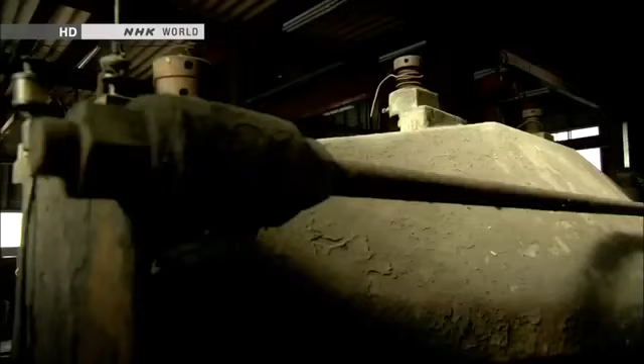The future is just around the corner. In a workshop near Mount Fuji, a curious being has appeared. It's 3.8 meters tall and weighs 4 tons. It is a giant humanoid robot named Kuratas.

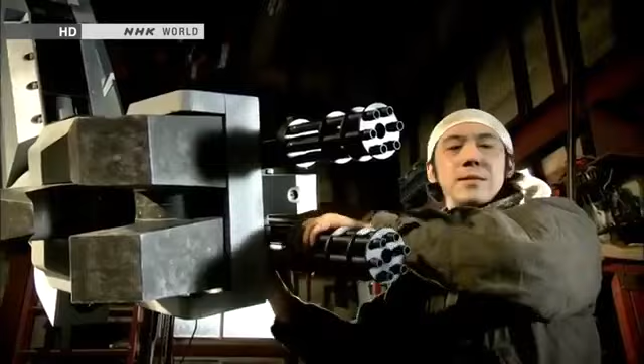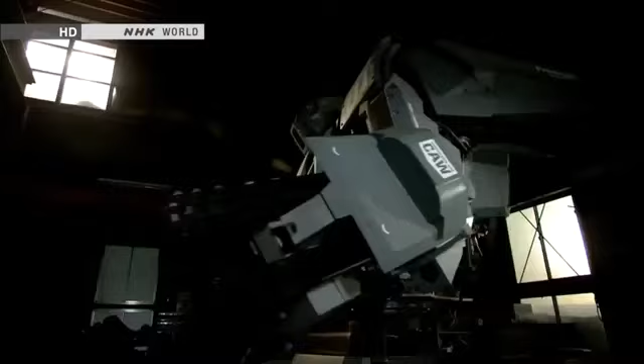Kuratas is a contemporary artist's creation. He holed up here for 2 years, building the robot with input from an expert. He calls Kuratas a work of art, but it's a sophisticated piece of machinery. A person seated inside can control the robot, move its limbs, and grab things. The artist says he was inspired by robots in science fiction tales and animation. That vision sustained him as he worked in solitude.

Things that were once unthinkable are becoming real. How will robots evolve? Well, military applications could be one option. They'll probably become more and more like humans. They could surpass us in strength and ability.

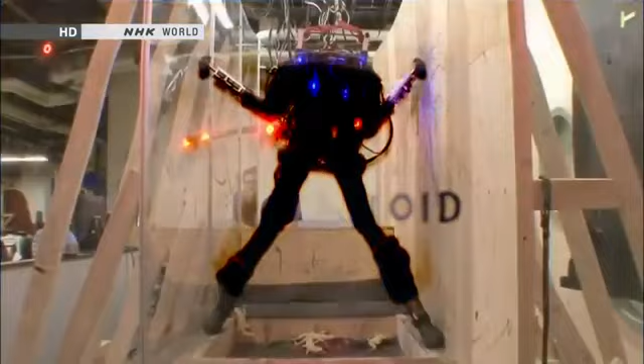People long dreamed of creating these extreme machines. Now, humanoid robots are here. They think like we do, move like we do, and even sacrifice themselves for us.

We want our robot to change society, because robots must be useful. Electronics and computing, progress in vision systems, there are many pieces of it. We will see much more capability continue to grow.

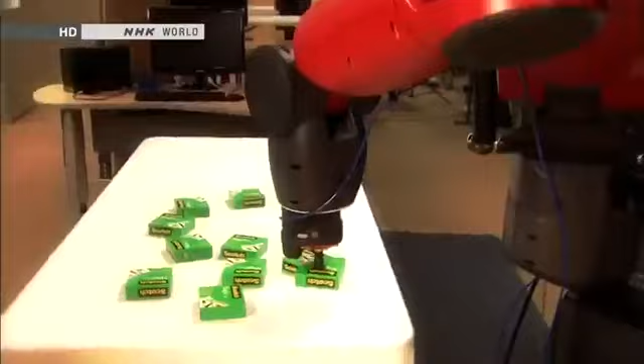Since the Industrial Revolution, people have entrusted some jobs to machines. But there may come a day when humanoid robots do much more complex jobs. Then, what will people do? You'll see more and more robots doing things in society, whether it's manufacturing or service applications or home healthcare applications. The key will be to skillfully divide labor between humans and humanoid robots.

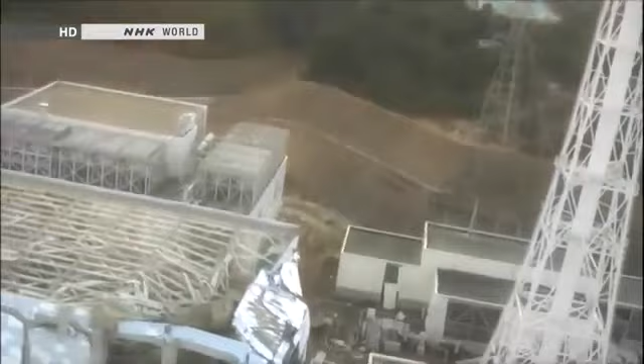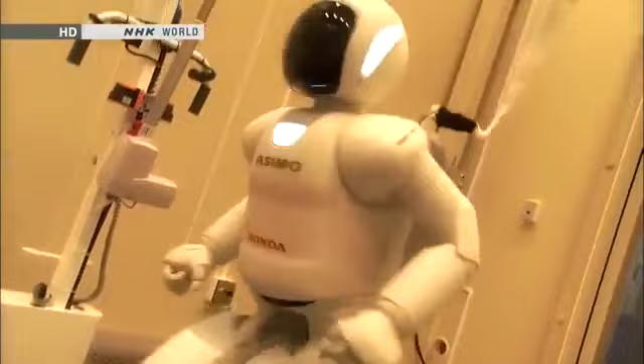We're eager to launch it soon to end the crisis. By joining forces, we can make a truly useful contribution. Only a humanoid could do it. Or the day will come when robots will really assist mankind.

The nuclear disaster in Japan sparked explosive advances in humanoids at the front line of robotics development. This program explores the future that's fast approaching.

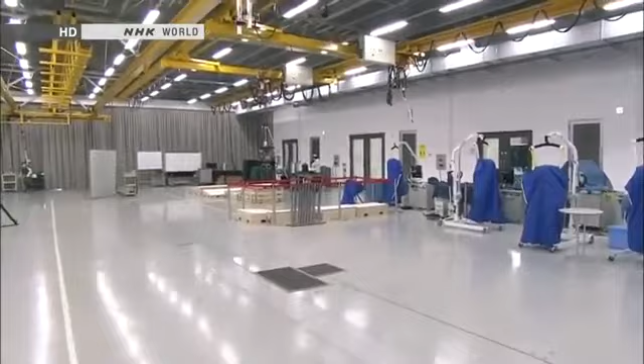Japan is a worldwide leader in the development of humanoid robots. Asimo is the country's crowning achievement. Engineers continue to make improvements.

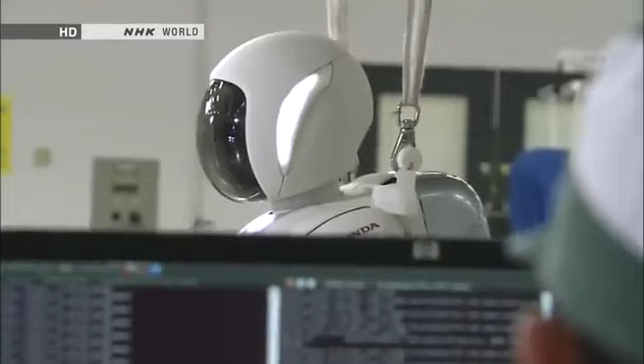Asimo's most innovative feature is its advanced intelligence. The robot can think and act on its own without human intervention. That's made possible by sensors that replicate our 5 senses.

Asimo's head contains 8 microphones. It uses them to listen and engage in conversation.

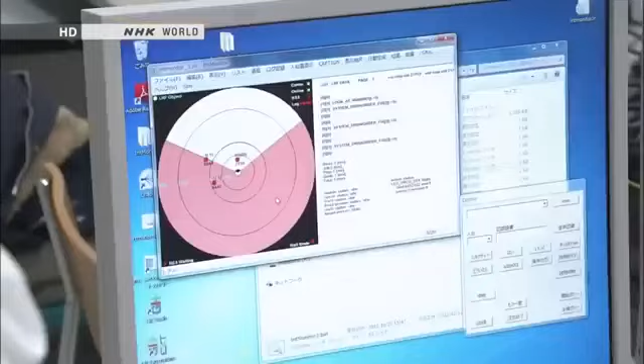Asimo's artificial intelligence analyzes a vast array of information. That's how it understands people's requests and takes appropriate actions.

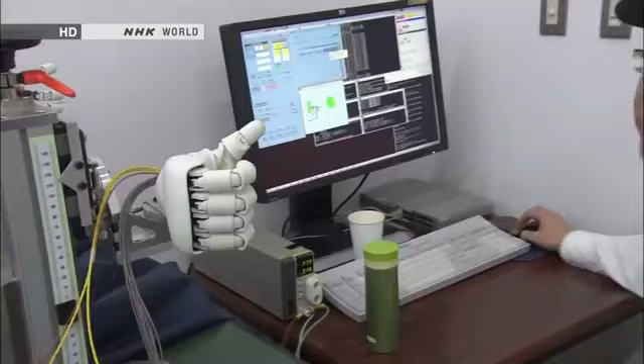Asimo also has a sophisticated sense of touch. Its fingers can make subtle movements, like a person's. Sensors are embedded in the fingertips, too. They can gauge the hardness of an object, like human fingers do.

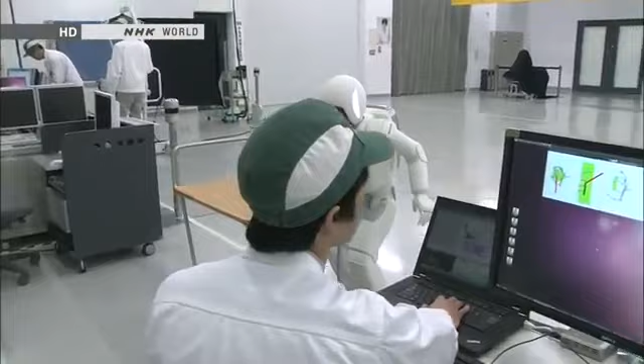Most robots use a fixed amount of strength to grab things. But Asimo exerts more power to open a tightly sealed water bottle and less when holding a paper cup. Its artificial intelligence uses information from the fingertip sensors to adjust the grip.

The developer's ultimate goal is for Asimo to be a valuable partner that coexists with humans. The engineers who created Asimo all grew up watching animated shows about robots, such as Astro Boy, Doraemon, and Gundam. They dreamed of someday making their own.

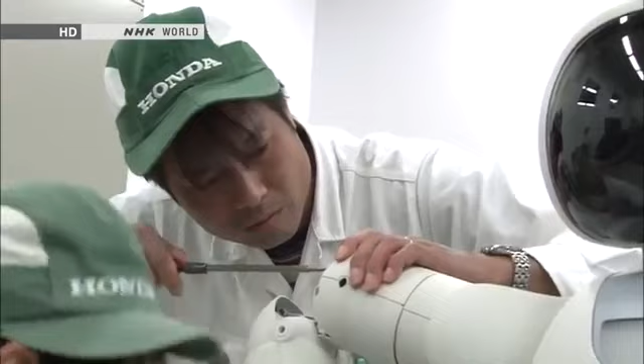Satoshi Shigemi is the development team's leader. He has been designing robots for the past 16 years.

From the beginning, we wanted to design a robot that could help people. To realize that dream, we're constantly asking ourselves, what kind of robot would be able to change society, make people happy, and make life easier for people around the world? Our idea is to create a robot that will change how people live. We're working through the technological issues, one by one, in order to reach that goal.

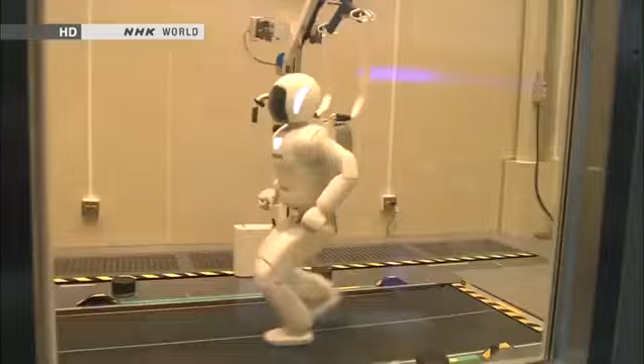Asimo's advanced physical capabilities are revolutionary. The robot can walk and run. It can reach speeds of up to 9 kilometers an hour.

For robots, walking is much easier than running. When running, both feet momentarily leave the ground. Balancing in mid-air is no easy task.

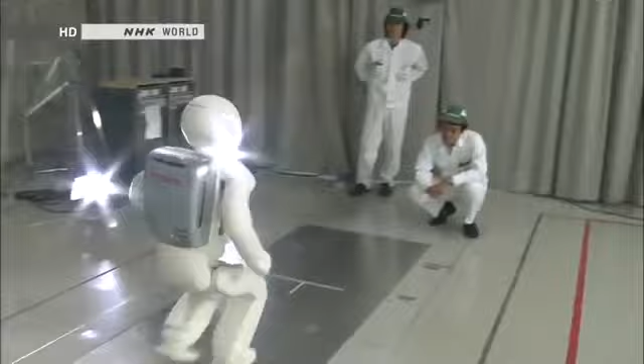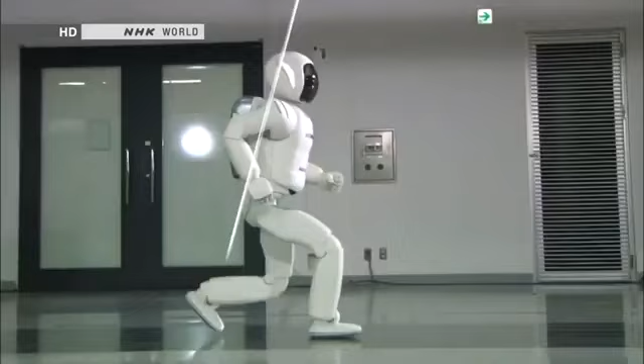Maintaining posture while jumping or floating in the air was a major technological breakthrough. Asimo leans its upper body slightly forward to maintain overall balance. It goes forward straight in the air.

Sensors in Asimo's waist measure the robot's angle. It leans slightly to compensate, forward or back, side to side. That's how it stays perfectly balanced in the air.

Asimo has been evolving ever since development began in 1986, much like a growing child. But something happened that made researchers realize Asimo's real-world limitations.

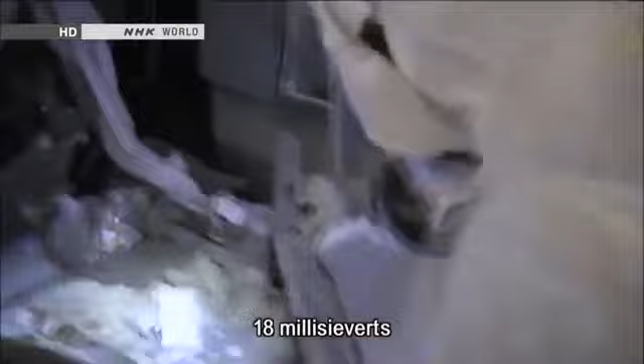It was the accident at Tokyo Electric Power Company's Fukushima Daiichi nuclear plant. The damaged reactors released radioactive substances, making it difficult for humans to deal with the crisis. People needed something that could confront the dangers and bring the plant under control.

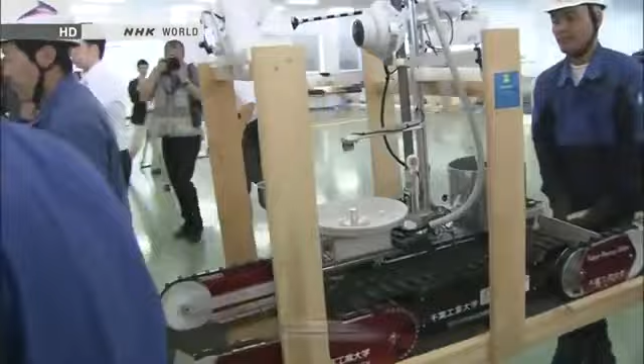Robots. Japanese officials sent a request for robots developed by the US military. Then, a variety of Japanese robots have been enlisted as well.

Robots have proven to be useful, but 2 years after the accident, they're only used for inspections. They're not able to do all the work of humans.

What about Asimo? Right after the disaster, people flooded Honda with phone calls and emails asking the company to send Asimo to the Fukushima plant.

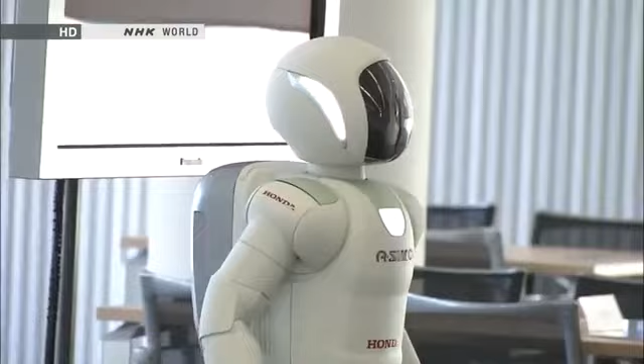But Asimo wasn't up to the task. It could move nimbly over an office floor and other flat surfaces, but large vertical gaps and obstacles were a different story.

We heard from many customers. We ourselves regretted that Asimo couldn't be of help. It was obvious that the Asimo we had built wasn't ready for real-life action. We realized right away that we needed to make something different, something new that could offer immediate assistance.

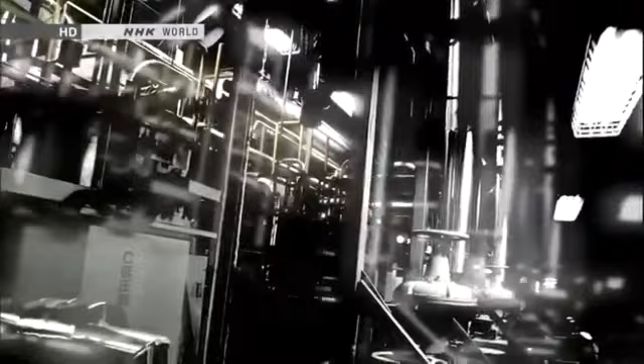Honda wasted no time. Company officials offered to create a robot free of charge to assist TEPCO in the recovery. TEPCO accepted. Officials asked for a robot that could open or close valves inside the nuclear plant. We wanted to flush out radioactive materials that remained inside the pipes and bring down radiation levels in the facility. That was our first goal.

Unless we opened or closed the valves, the area would remain highly radioactive, and that would prevent workers from entering the facility, and impact the entire decommissioning schedule.

How many valves are there? Each unit has from several thousand to tens of thousands of them.

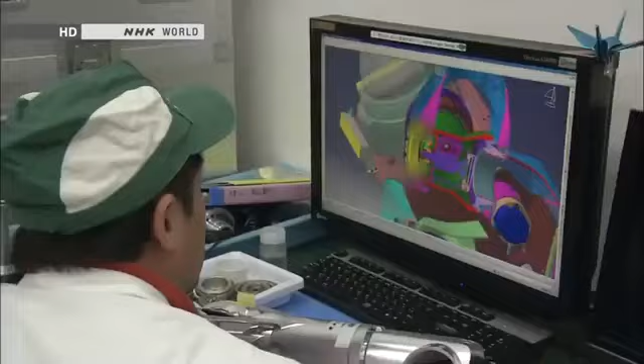In July 2011, 4 months after the accident, Honda began designing a robot for use at the nuclear plant. Members of the Asimo team were put in charge of the project. A humanoid robot would take too long to build, so engineers focused on making a robot specifically for operating valves.

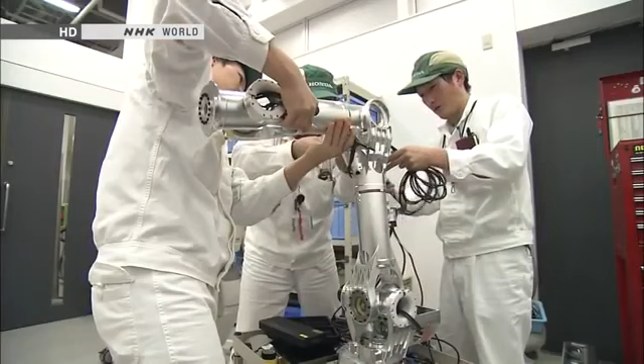Asimo was crucial to their efforts. Its ankles employ advanced balancing technology. Developers reasoned that using it would allow the new robot to work inside rubble-filled reactor buildings.

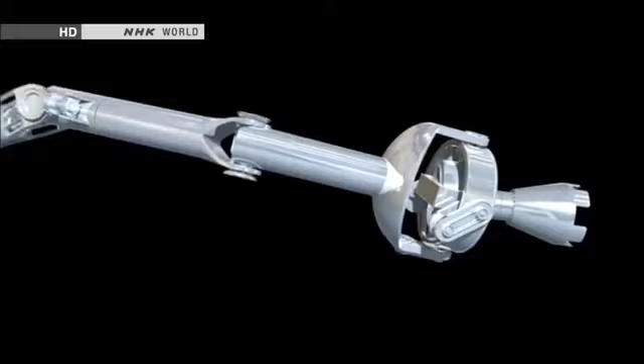The team worked exceptionally fast, completing a prototype in just 4 months. They turned Asimo's leg into an arm for operating the valves. Even when the base moves, the arm remains steady.

So far, so good. Officials from TEPCO evaluated the prototype at the National Institute of Advanced Industrial Science and Technology. The government-backed group for cutting-edge research contributed to the development effort.

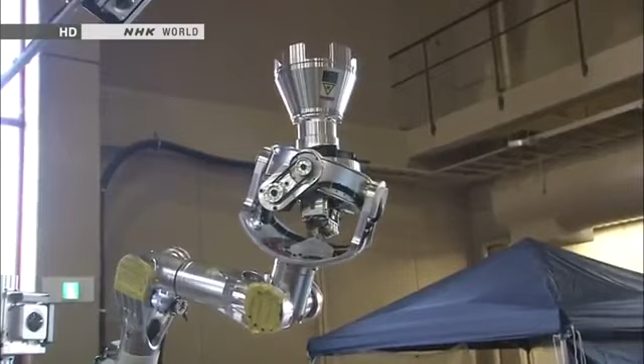A TEPCO official couldn't take his eyes off the robot's movements. We may be quite demanding. That's okay. We might be quite direct.

The test is designed to replicate conditions inside the nuclear plant. The robotic arm is remote controlled. Testers send the arm toward one of the valves.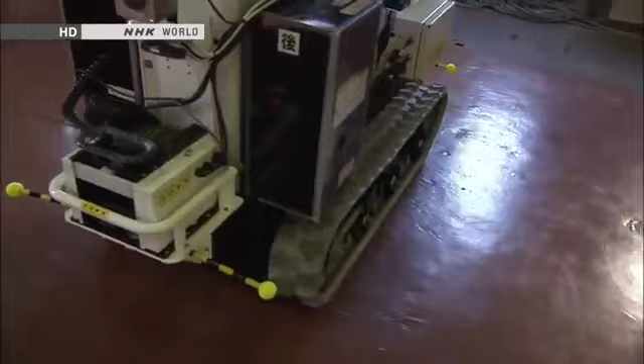There are a number of unknowns, including the condition of the valves. They may have rusted since the accident. A valve might break if the robot applies too much force, or it might not budge at all.

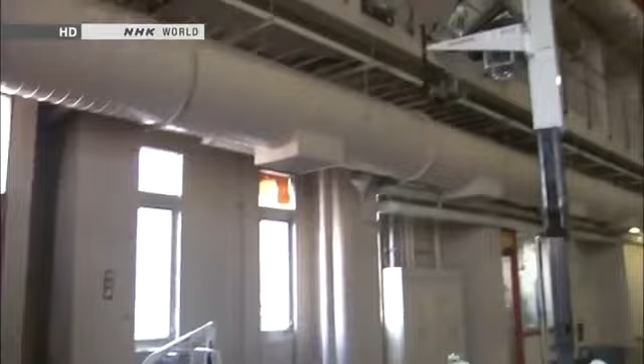The robot uses just the right amount of force and turns the valve on the first try. It's passed the test.

This robot can do more than inspections. It could help in the recovery effort.

From what we've seen, the robot seems near perfect. We want to use it as soon as the need arises. It's important that we quickly do what we can to make that possible.

The Fukushima accident also encouraged U.S. developers to design emergency response robots. Department of Defense officials have spearheaded the effort. Before, they had shown little interest in humanoid robots. Now, they view them as vital for disaster response.

The architect of the new strategy is Gill Pratt of DARPA. He oversees funding for leading-edge research at the Department of Defense.

There are many aspects of disaster response in Fukushima that inspire people in robotics to work on new capabilities. If they were able to take action during those first 24 hours, then the first reactor maybe would not have blown up, in an environment that is too dangerous for a person to do.

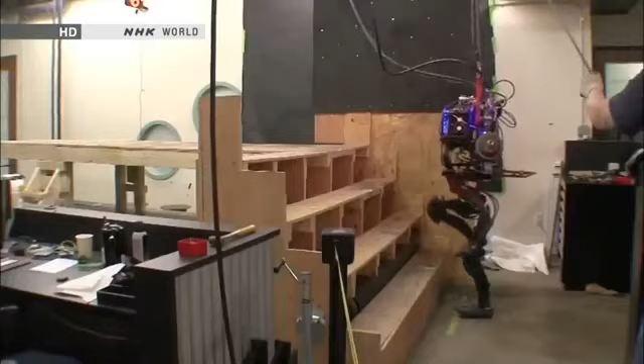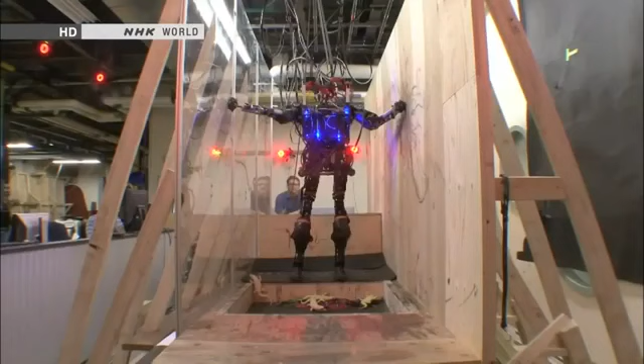Tests of this prototype were going smoothly. It can easily climb stairs and jump from a height of nearly 1 meter. It can negotiate obstacles using its arms and legs. It can already handle more demanding environments than ASIMO can.

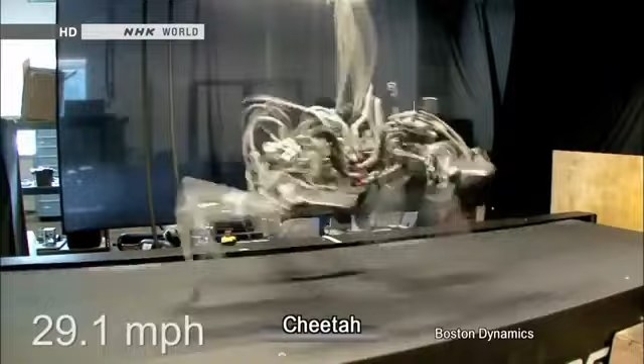Atlas is loaded with technologies originally designed for military robots. A quadruped robot called Cheetah can race through a battlefield at 50 kilometers an hour. LS-3 is for transport. It can carry heavy supplies for soldiers.

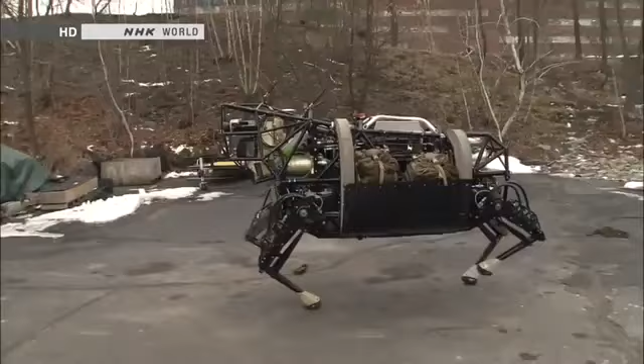The ferocious-looking robot gets its strength from a powerful hydraulic drive system. A hydraulic device can be small, yet quite strong. The black cables convey hydraulic power to the legs. That generates the brute force required for harsh conditions on the battlefield.

A web of hydraulic cables covers Atlas's body. They form a muscular suit of armor for clearing debris.

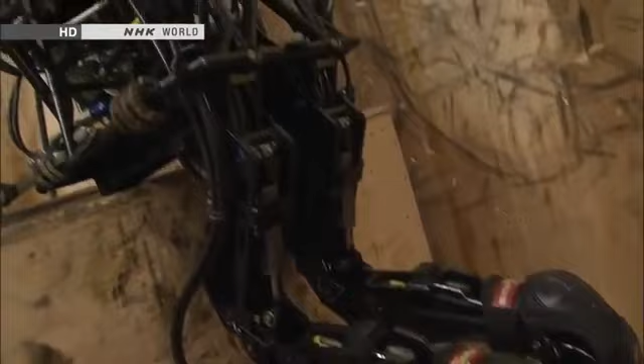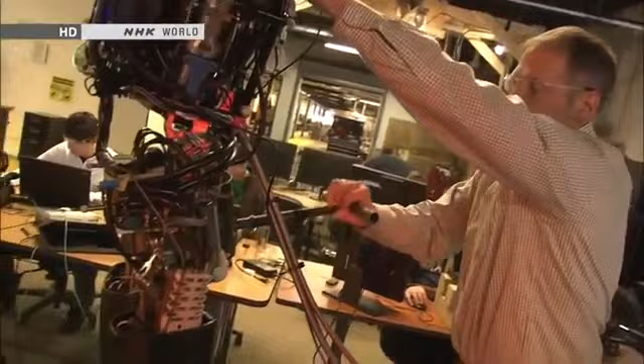Another important technology comes from military robot engineering. This machine's joints have a wide range of motion. They allow for flexibility that humans can't achieve. Atlas's joints are capable of moving in 28 different ways. Atlas can crawl through narrow spaces and withstand sudden shocks.

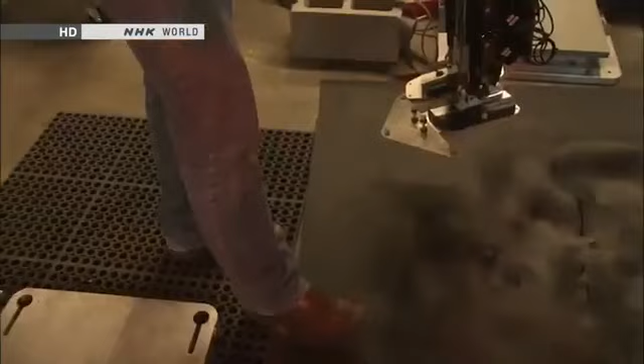But then we have the knee. This has 3 in the hip, just like us. This way, and then this way. I am very impressed with the number of degrees of freedom. It will be able to do these human-compatible tasks without a lot of the limitations that other robots have.

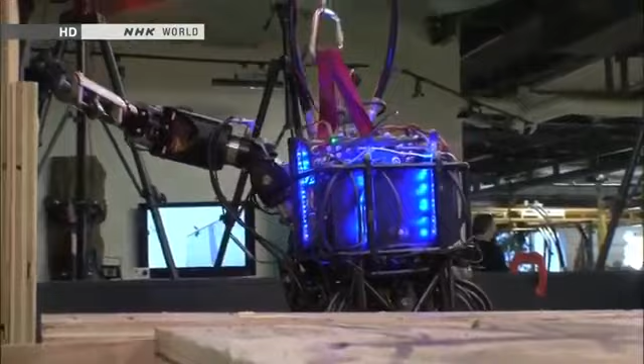Engineers will combine Atlas's rugged body with sophisticated artificial intelligence that's almost near completion. They aim to complete the robot by December of next year.

One reason you see humanoid robots is because there are some people working who are really interested in robots as an entertainment thing or as a performance thing. I think that's different. We're much more interested in basic capabilities for emergency response, rescue. So I don't think ASIMO has been designed to do those things yet.

U.S. engineers stepped up their efforts to develop humanoid robots after the nuclear accident in Japan. Japanese researchers are embracing the same mission.

In November 2012, robot engineers from around the world gathered in Osaka for an international conference on humanoids. Gill Pratt from DARPA was one of the participants. He came to invite engineers to join a project sponsored by the U.S.

Defense Department. Okay, March 11th. After 24 hours, if only a robot had been there to go and open that valve, the entire disaster could have been averted. But we didn't have one. And furthermore, we didn't have anyone that could do the job. So shortly afterwards, we actually started planning the DARPA Robotics Challenge.

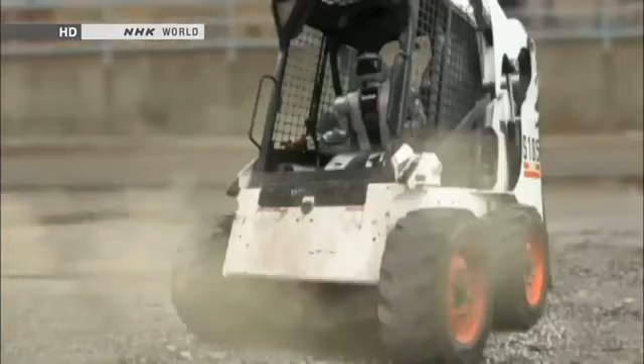The challenge consists of 8 tasks. Driving a vehicle to approach a disaster site. Walking over rubble. Removing obstacles. Opening doors. Using tools to break down walls. Climbing ladders. Turning valves. And making repairs.

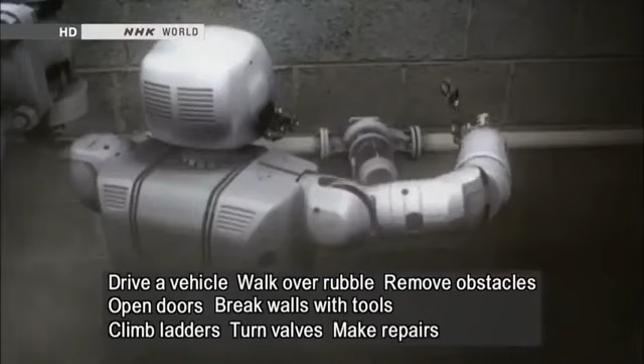A single robot must complete all 8 tasks. The development period is 2 years. DARPA will provide contestants with funding of up to $4 million.

DARPA has received over 100 proposals from research groups worldwide. They include renowned organizations like NASA and MIT. Japan is at the forefront of humanoid robotics engineering, yet its researchers hesitated to throw their hats into the ring.

So actually, to me, it's difficult not to see that some of the results of DRC are going to be used to advance, as you say, advanced military technology. The DRC is about developing robots that I believe wholeheartedly are completely impractical for military purposes, for offensive military purposes.

Will the technology that we come up with find its way into military systems? Probably yes. But I guarantee you that if you work on a robot for healthcare, there's a chance that that technology will also find its way into military systems.

The members of one Japanese research institution wanted to take part in the competition.

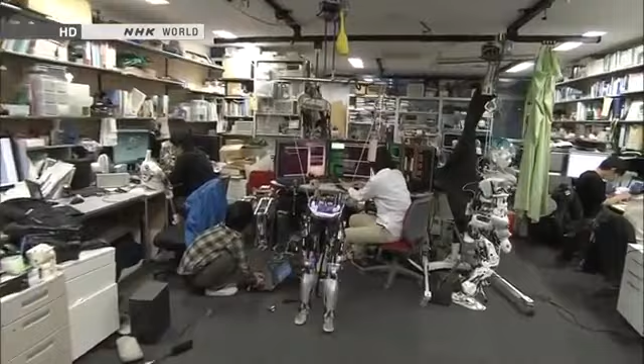They worked at the University of Tokyo's robotics lab. Researchers there, along with those at Honda, are global leaders in robotics engineering. But they faced a major obstacle to competing: the university bans military-funded research.

Three researchers made a decision. They told the university they were leaving. Then they decided to set up a venture company and enter the DARPA Robotics Challenge. They couldn't shake the feeling that they should leave their quiet university lab and help resolve the nuclear crisis.

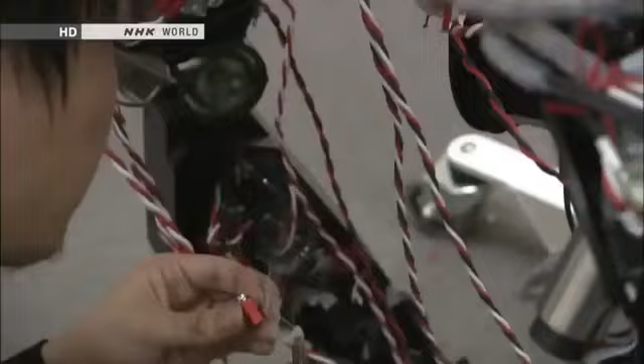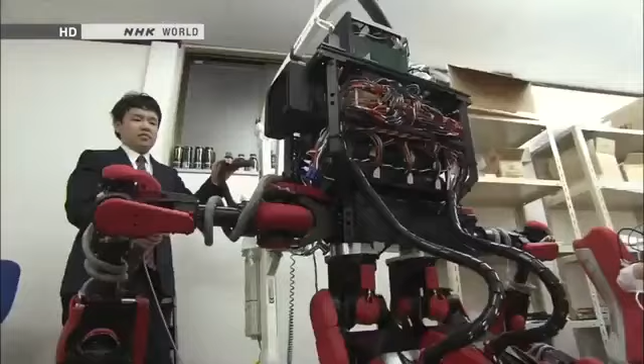Six months after launching their venture, the team had just completed a prototype with help from university graduates. Its long arms can exert 10 times more force than those of conventional humanoid robots.

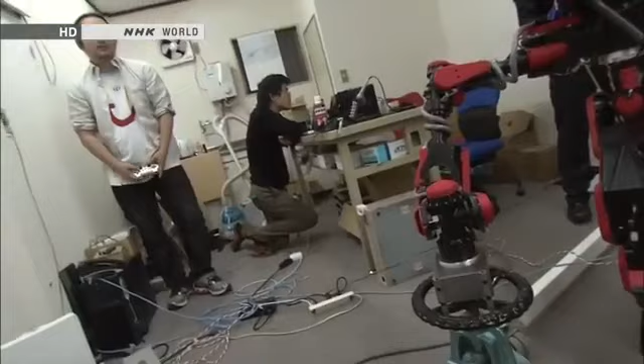It's too tight to turn with one hand. It can easily turn a valve that's too tight for a person to turn. The strong force comes from a large electric current that pushes the motors to their maximum limits.

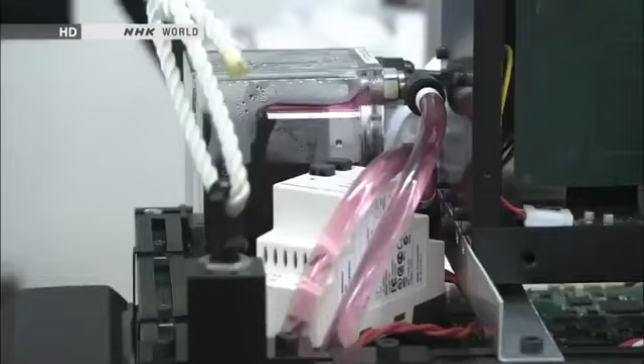A reddish fluid circulates through the robot's body. The fluid serves as a coolant that keeps the motors from overheating. The cooling system should enable the robot to perform hours of grueling work at disaster sites.

The time has now come for the developers to apply their years of research to the real world. A nuclear crisis has happened here in Japan. Radiation is escaping. Researchers in every field must wonder at least once if the technology they've been working on could help resolve the crisis. By joining forces, we can make a truly useful contribution. It's with this in mind that we decided to enter the competition.

One country is quickly catching up with Japan in humanoid robotics: South Korea. KAIST is a government-funded lab for the advancement of science and technology. Researchers there were among the first to express interest in DARPA's Robotics Challenge.

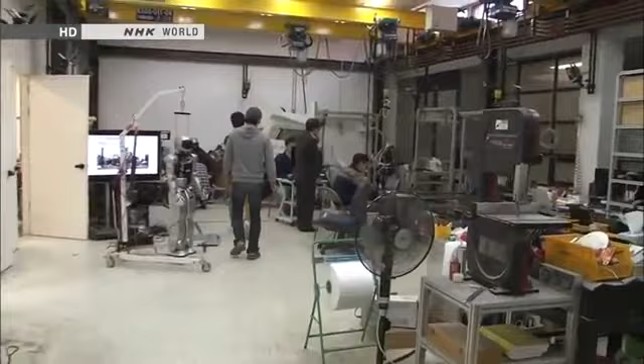This humanoid robot is called Hubo. It's modeled on Asimo, which Honda spent 14 years developing. Hubo was built in just 5 years. Hubo deftly manipulates its hands, and it's also good at dancing. Its moves look just like Asimo's.

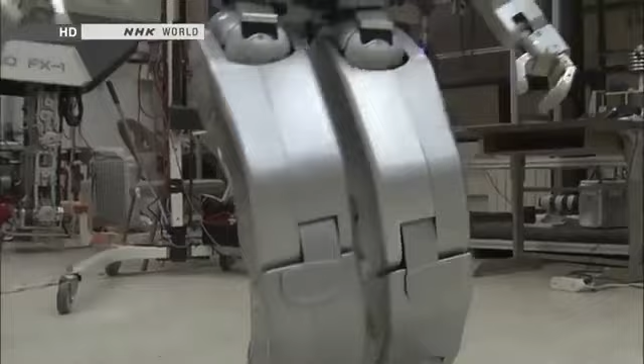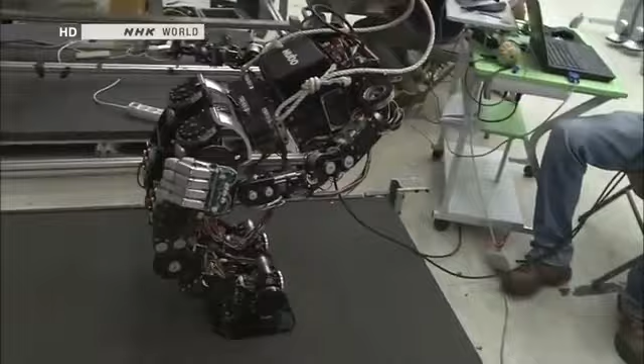Hubo has been undergoing a major upgrade ahead of the competition. It can now bend forward at the waist while walking to handle all kinds of environments. It can quickly pick up tools. The tests were going well.

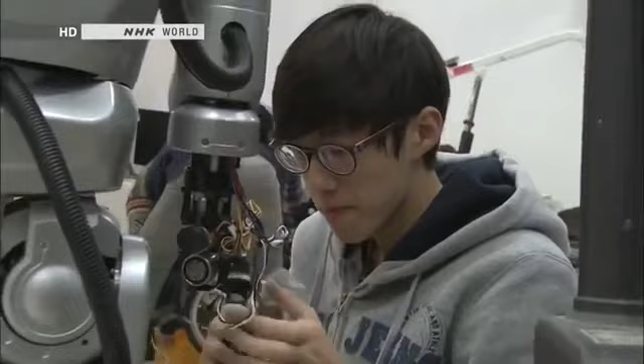People have always compared Hubo to Asimo. Engineers now had a strategy to get ahead of the Japanese developers. They decided to publish certain details about Hubo's design and pursue joint development with researchers at other institutions. One could say that this space inside Hubo's chest captures the heart of their thinking.

It's empty now, but this is where artificial intelligence will be installed. It's removable. Hubo does not yet possess artificial intelligence. Its motions are as sophisticated as Asimo's, but Hubo's movements are all pre-programmed. U.S. universities that lead research into artificial intelligence will develop a brain for Hubo.

The stage has been set for a joint U.S.-South Korean team to compete in the DARPA Robotics Challenge. Sharing is the key to making technological advancements. That's true in South Korea and in other places too. Research shouldn't be confined to one place. People developing humanoid robots elsewhere are too close-minded.

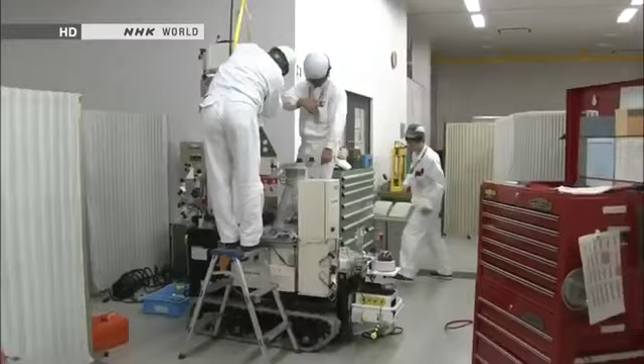Researchers at Honda were also invited to enter DARPA's competition, but they declined. Their energies were focused on designing a robot to tackle Japan's nuclear crisis.

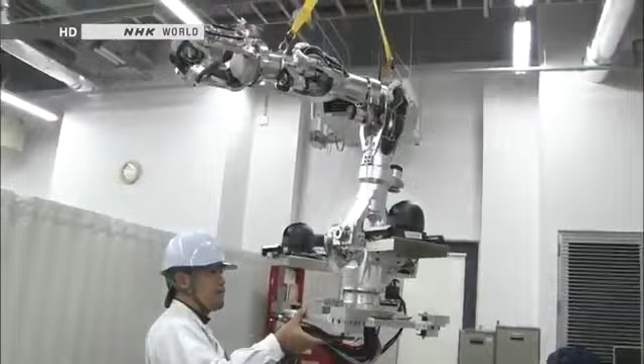Nearly a year has passed since Honda's robotic arm passed evaluation tests, but the device has yet to be deployed to the nuclear disaster site. That's because officials at TEPCO requested a change in specifications.

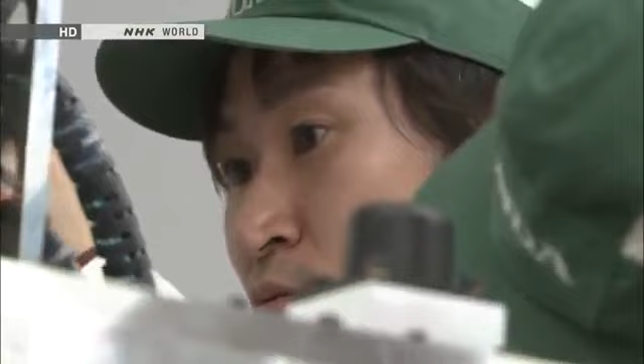Engineers have replaced the valve-turning hand at the end of the arm with a camera. TEPCO had changed its plan. Officials decided to put priority on assessing conditions inside the plant's facilities. They said it was too early to have robots work on valves. There wasn't even a recovery plan in place when we were working out the valve manipulation tasks.

Confusion also prevailed at the site. We were expecting valve work to begin 2 to 3 years after the disaster. But the timing has ended up being later than what we'd assumed one month into the crisis.

The robotic arm will soon be sent to the accident site. It will provide the first images filmed from high up. The robotic arm was not the end of Honda's efforts. Its engineers had another secret mission.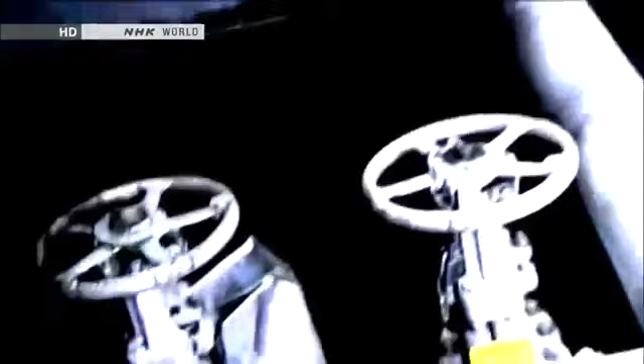They would develop a new humanoid robot, an updated version of Asimo for use in disasters. The site where the Fukushima disaster took place is dark and off-limits to humans. Only a humanoid robot with both intelligence and motor skills could climb over the debris, get to the accident site, and perform the work of people. In other words, a robot like Asimo.

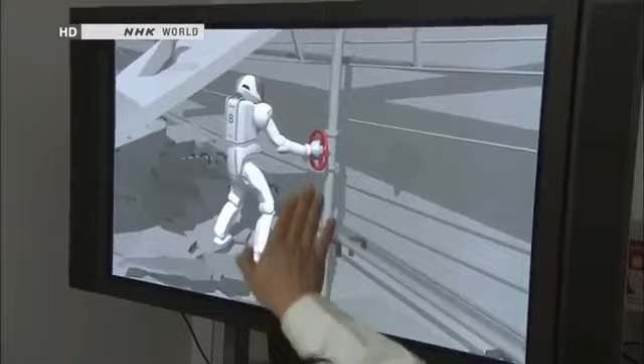Let's use our skills to make a humanoid robot that can tackle disasters. Asimo's engineers were united by this idea. The robot they envisioned would not only walk, but also use its arms to crawl, using every means possible to reach its destination. A dramatic update would be necessary.

A disaster response robot would be useless if it couldn't get to the site. It's important to get to the scene no matter what. Disasters create all kinds of debris that crumbles easily or breaks when stepped on. It's because it's dangerous that robots replace humans. That's what makes them valuable. A robot that couldn't get to the scene would be totally useless.

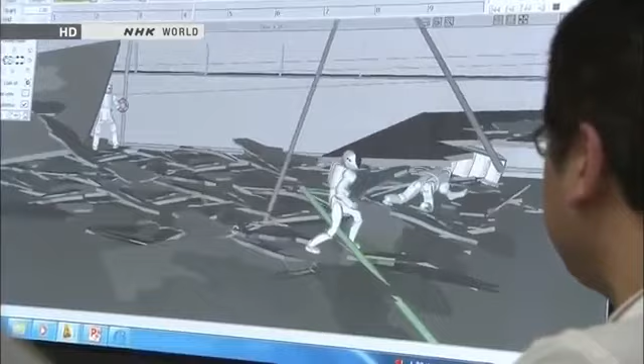Honda's engineers began developing robots in 1986 with the goal of making people happy. 27 years of research is now being put to the test. As we saw in the Fukushima Daiichi crisis, the bottom line is that robots can stand in for humans in places that we can't go to or that are too dangerous. I am committed to delivering what's needed, when needed, in the shortest amount of time.

The accident in Fukushima spurred the development of humanoid robots around the world. The disaster also prompted people to question the roles of humans.

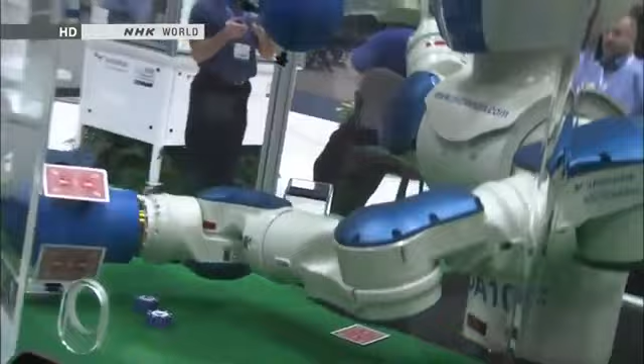One of the largest industrial robot shows took place in January. Global manufacturers displayed their latest models. Companies are developing more and more two-armed humanoids for industrial use. One new product at the event caught a lot of people's attention.

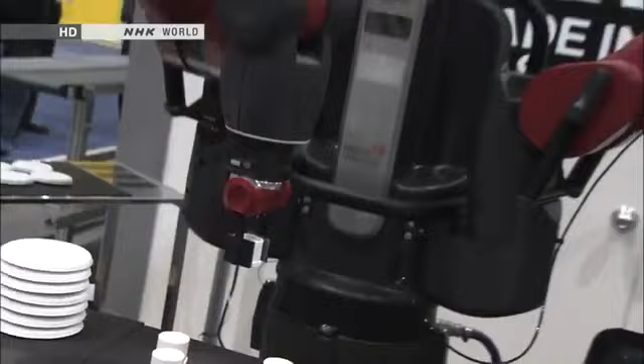Baxter was created by the inventor of a best-selling cleaning robot. It's equipped with sophisticated artificial intelligence, designed to work side by side with people in factories and other settings. The robot's most unusual feature is its ability to master a task in a matter of 5 minutes. All that's required is step-by-step manual instruction. No complicated programming is needed.

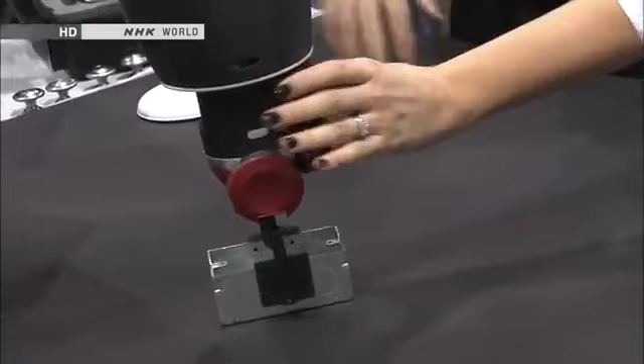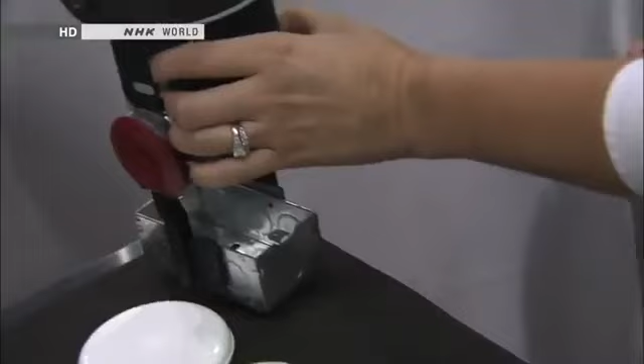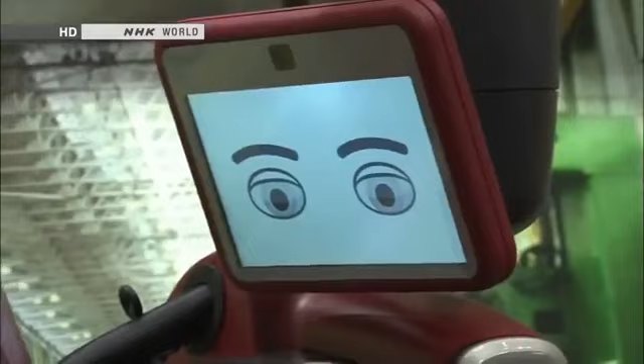The expression on the face on the LCD screen shows whether or not the robot has understood the task.

Baxter costs $22,000, a bargain for a humanoid robot. The maker says buyers can recoup their investment in several months and slash labor costs. I'm very impressed with it. I work for a small manufacturing company, and we have some older employees who are looking to retire, and there's some tasks that Baxter could do for us very effectively. Plus, it would be cheaper than employing a person. It's not going to get tired. It's not going to need to stop. It'll keep running while everybody else is taking their lunch.

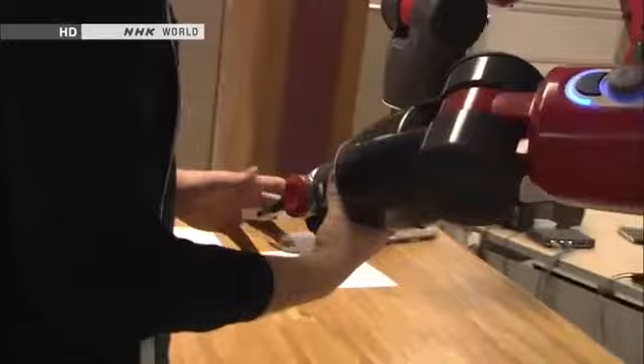The Boston-based manufacturer has a flood of back orders. Officials say someday Baxter will work at places like coffee shops, taking orders and grilling burgers. Eventually, they expect to have 500,000 U.S. customers.

Today we're focused on manufacturing, and there's a very big opportunity in manufacturing, but there's lots of other places that a robot like Baxter could go. We had the Industrial Revolution at the turn of the last century. We've just gone through the computer revolution, effectively at the turn of the most recent end of the century. We are now into the robot revolution.

Will people and robots someday compete for jobs?

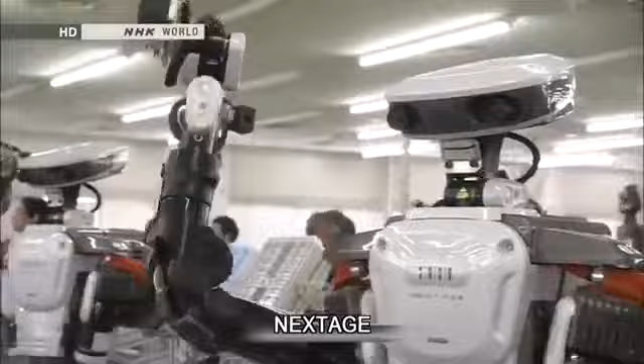At 8:30 one morning, a group of new employees takes part in daily morning exercises. They are 13 humanoid workers called NEXTAGE. This company began using the robots in earnest last year. They have 2 eyes and are just like humans. They're cute. This factory manufactures money sorting machines for cash registers.

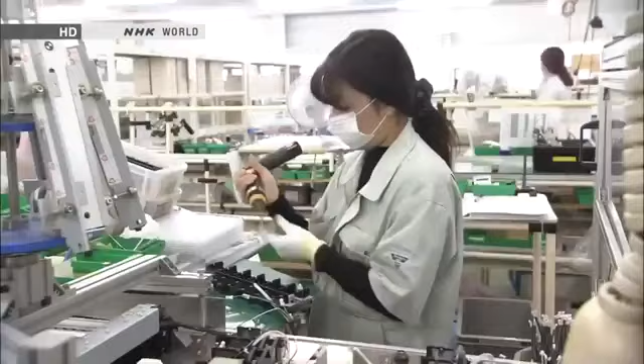The humanoids work on a production line that was previously manned entirely by humans. The robot visually confirms the parts set in place by a human worker, then it begins its task.